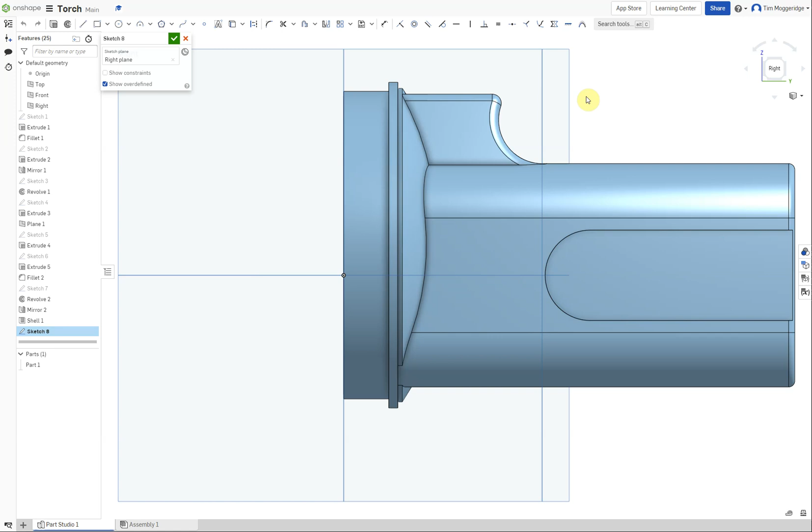We're going to draw the handle over here, and to start with we'll convert a couple of lines using the conversion tool: the top edge of the torch and this little arc over here. We might need to zoom in to pick up the curve and not just the center point, then zoom back out again.

I'm using the scroll wheel on the mouse to do this, and using this software with a mouse is so much easier than just using a trackpad. So it's a good idea to invest in a mouse if you haven't already done so.

Now we're going to add some lines. I'll pick the line tool, and remember, if I click and then click again, it will do a multi-line. So I've just done a vertical line, a horizontal line, a shorter vertical line, and another horizontal line, then I'll press escape to end the line, and now dimension those.

I'm going to dimension 40 millimeters from the line we created just now to the top line. Just enter 40 on the keyboard and hit enter.

I'm going to dimension the length of this line as 98 millimeters, and the length of this line is going to be 16 millimeters. That's that drawn so far.

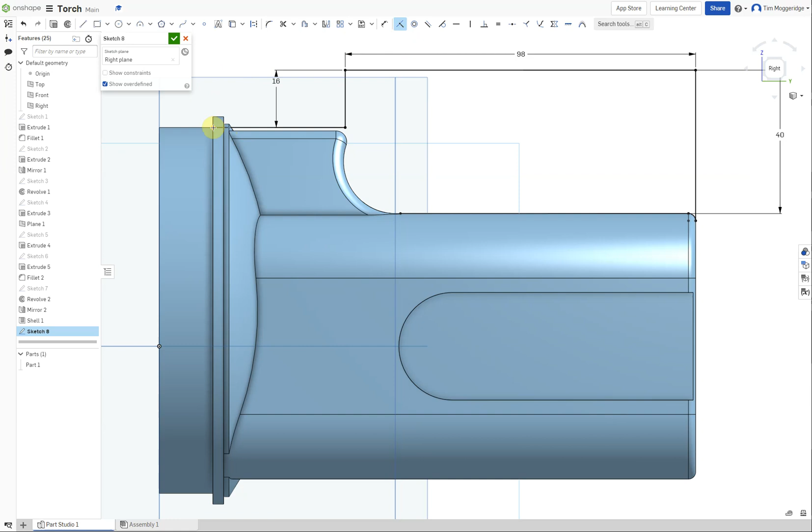I'm just scrolling around with the mouse again. The next thing I'm going to do is sort out the length of this line, using the coincident point tool. I'll pick the coincident point here, select the end of that line, and then select this line here. And there we go, that's moved to that point.

Zoom out, zoom in, so you've got an idea of the sketch we're doing. So there's a kind of basic outline shape for what we're going to do. We just need to add the inner part in as well.

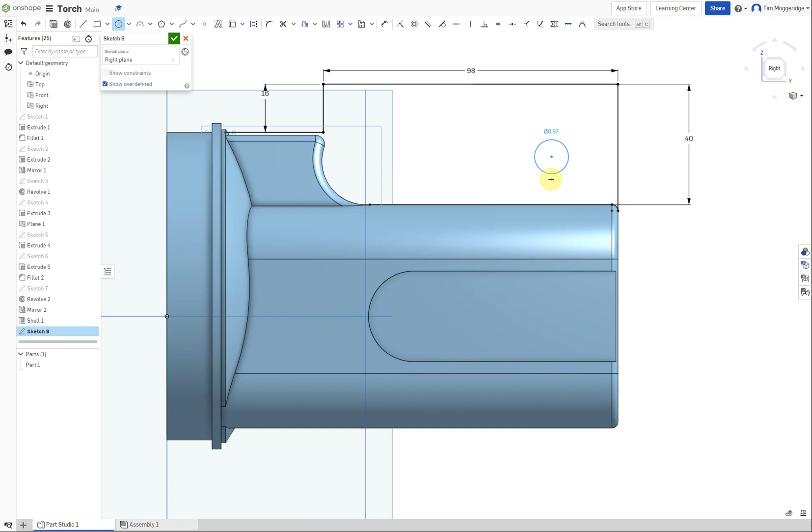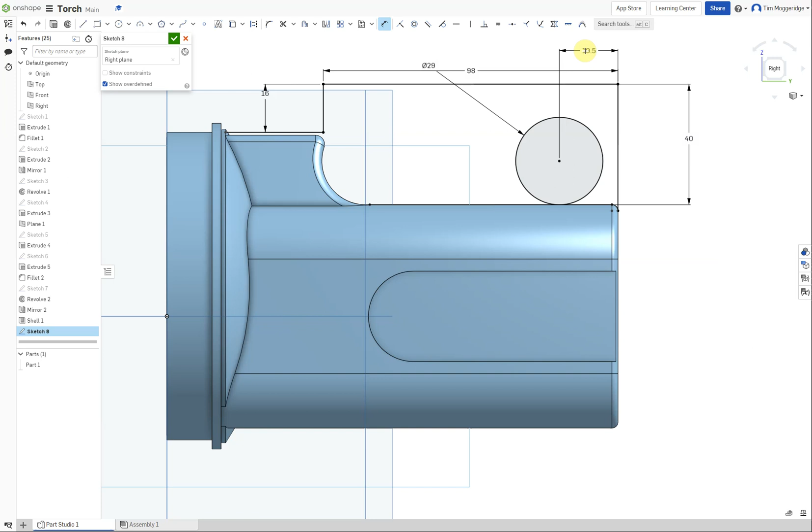I'm going to use the center circle tool and draw a center circle over here, coming down to that line so we have a tangential relationship. Then I'll dimension that so the diameter is 29 millimeters, and the center from the end line to the center of the circle is going to be 19.5 millimeters. Now we need to do a similar thing up here.

We're going to initially convert this line using the conversion tool again. Click on that line to convert it, then extend that line round. Under the trim tool there's the extend tool, and I can select that line and bring it all the way around to make a complete circle.

Now I want to draw a line that goes between the top two edges of these circles, using the straight line tool. I'll make sure it lines up with the origin and click, and again make sure it lines up with the origin and click, which allows me to put that line in. Press escape to end the line.

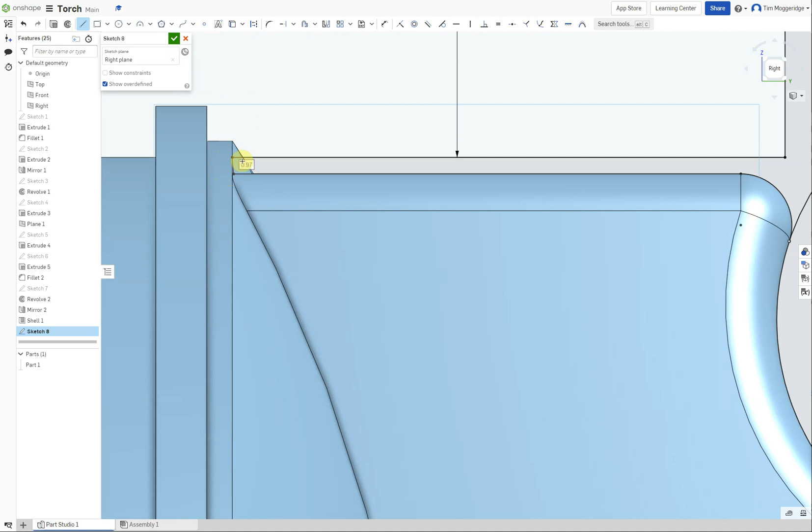We just need to add some bits in here, again using the conversion tool. Left click on the conversion tool, pick this line, and then pick this arc. Finally, the last thing I need to do is draw a line between these two dots. I'll zoom in, use the line tool, pick the end of that line, and snap it to the end of that line. Okay, and that's not quite gone to the edge.

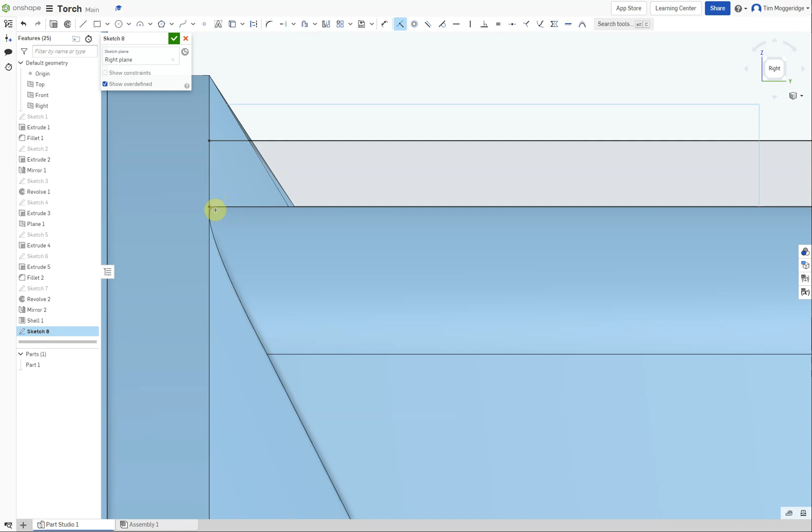You can see there from the little curve. So what we will do is add a relationship on there. Go to the coincident point, click on there, click on that line. Now you can see it doesn't like it, because it's already on the geometry. So let's delete that relationship, and you can see now that's joined that up.

So that's the basics of our shape. Let's right click and zoom to fit, and trim away the bits that we now do not need.

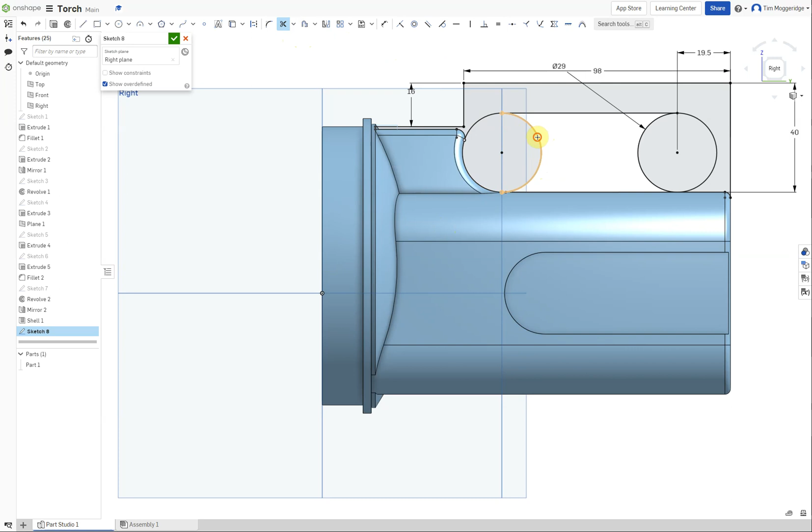We're going to use the trim tool, which may well be hiding under our extend tool. So go back to the trim tool, and firstly we're going to remove the inside of that circle and the inside of that circle, and we also no longer need this line here. If we come down there, we can see we've got a line there as well, so it's important that we take away this line.

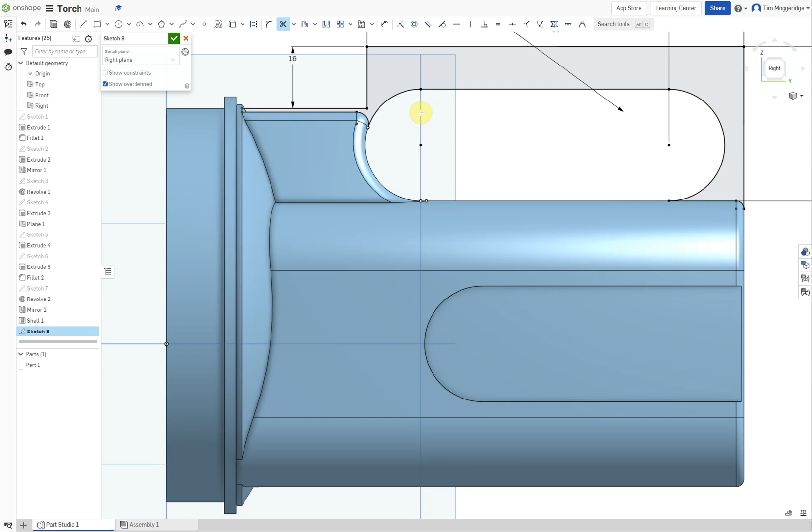And our shape has now gone grey. So we've got this shape all the way around here and up to here, which is what we want for the handle. We'll left click on here and change that to isometric so we can see what we're doing, and we're going to extrude this.

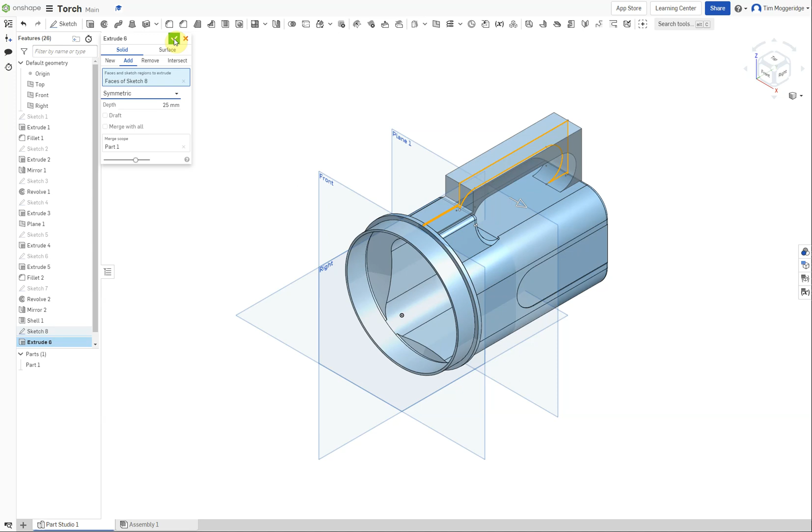So we're going to click on the feature tool, extrude feature. We want a distance of 25 millimeters, but we want it to be symmetric, so we're going to change that to symmetric, and you can see how it changes on there, and then we will click the tick to say that we are happy with that.

Now before we go any further, we need to add in a fillet on both of these ends, put a curve on, so we use the fillet tool. So we use the fillet tool here on this end, just click on there, and I'm going to change that distance to 18 millimeters and hit enter, and then tick to say I'm happy.

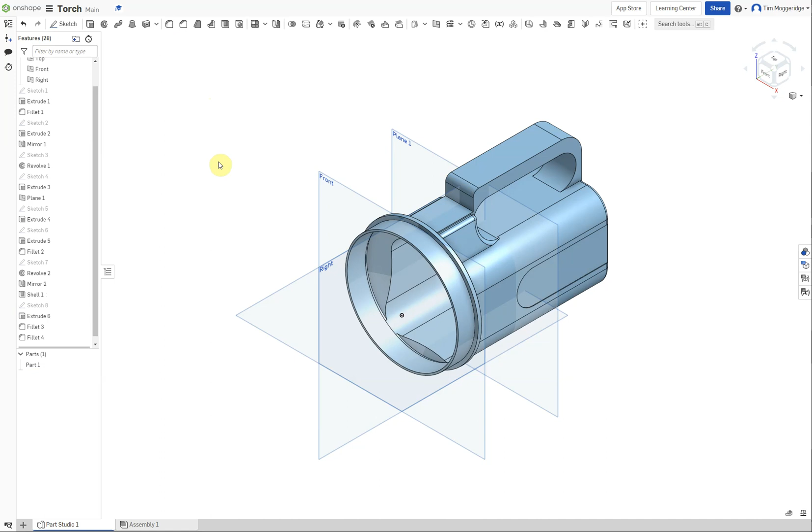And then I'm going to use the fillet tool again and click on this end, and this time it does just want to be 5 millimeters, so I can leave it at the default, so I can click and leave that to say that I'm happy. So at that point we've drawn the block of the handle in.

What we now need to do is add in the recess that's modelled on the torch. We're now going to add in the recesses, so we're going to create a new sketch on the right plane again. So right click on the right plane, left click on new sketch, press N to view normal to the sketch, and we'll just zoom in.

Now we're going to start off by creating some lines offset to the top and the bottom edges of the handle. So we're going to use the offset tool. I'm going to click on the top edge, and click on the radius on the right. I'm just going to drag now the arrow inside, because that's the direction I want to do. Hit enter, and then that will allow me to change the distance. So I'm going to hit 3 on the keyboard and hit enter.

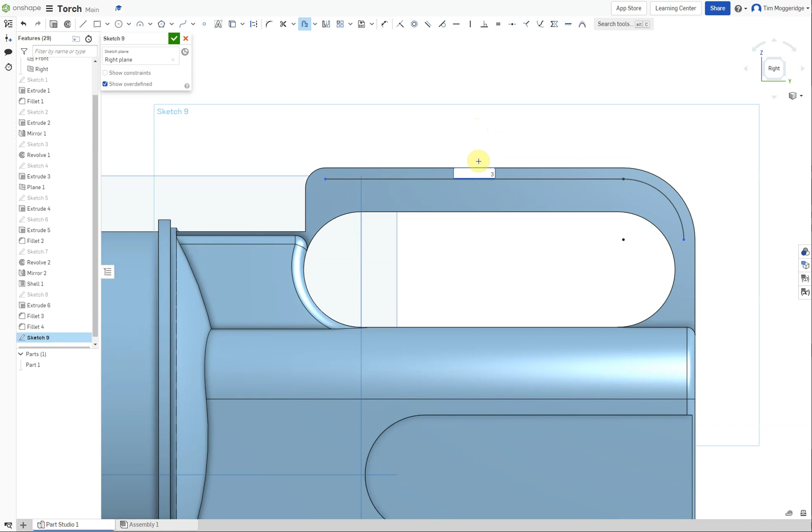And I'm going to do the same on the bottom edge. So pick those 2 lines, but drag the line above this time, hit enter, change it to 3, hit enter again. I'm now going to draw a 5 millimeter diameter circle.

Anywhere over here will do. What I'm going to do is just drag out a circle to start with, and then I'm going to dimension it so that it is 5 millimeters in diameter. I'm then going to dimension it so that the center of that circle is 80 millimeters from the end line that we did, 80.

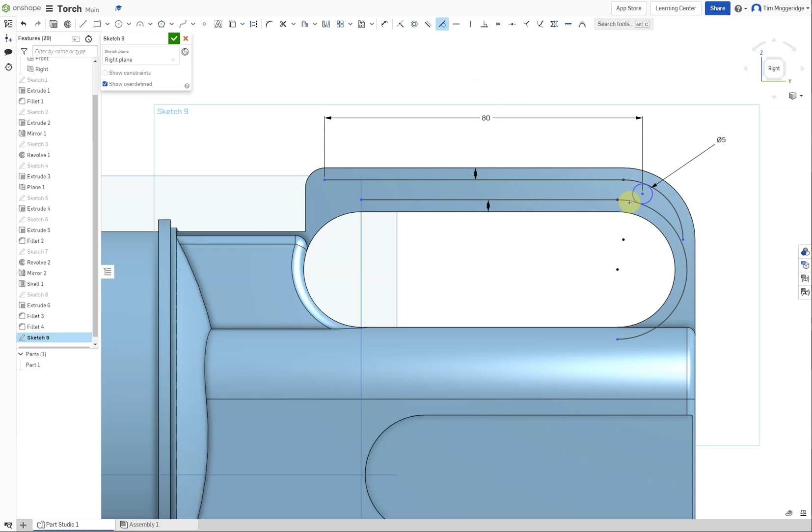And I'm now going to add a tangent point to it so that that circle and that curve are in touch with each other. And you can see that that almost touches this one. So again, touch that one and touch that one, and it will move so that that circle is positioned so it's got a tangential relationship with those 2 curves, but it is 80 millimeters away from the end of this line.

I'm now going to extend this line over to here, so we're going to use the extension tool again.

Click on there, click to the edge, and it's just gone over the edge slightly, which is fine. Now I'm going to draw another circle.

So I'm going to hover over the end of that line, come down, click so I'm vertically under it, click so I've attached to the line, and I'm now going to dimension that circle so that it is 5 millimeters in diameter. I can then use the trim tool, which is under the extend tool at the moment.

I can trim this line back to the circle. I can trim off the inside of that circle, and then over here I can trim the ends of those 2 curves and the inside half of the circle as well. So that's the first part of the slot drawn.

I now need to create 2 other slots over here. So again, center point circle. I'm going to come over here, draw a circle and put it there, and draw a circle over here and just drag that out. As long as they're approximately in the right places, that will be absolutely fine.

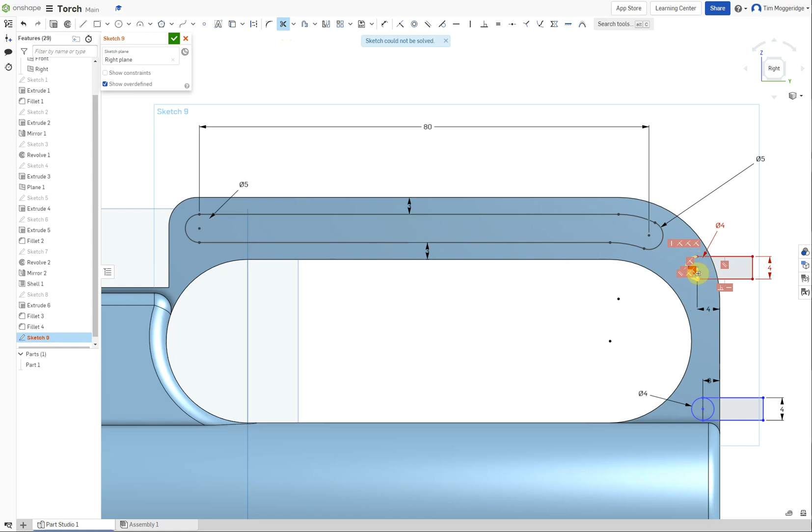I can now trim out the bits that I don't want, so I'm going to trim there, and if it comes up with an error, don't worry, I can trim there and there, and it will go back to the right colour. And likewise I can trim there and it won't like it, but if I trim off the other two parts of that circle...

It suddenly is okay. Last thing I need to do is to position these two vertically. So again, I'm going to go back to the dimension tool. From the center of this one to the center of that one wants to be 25mm, and from the base here to the center of there wants to be 2mm. And that's the position of those.

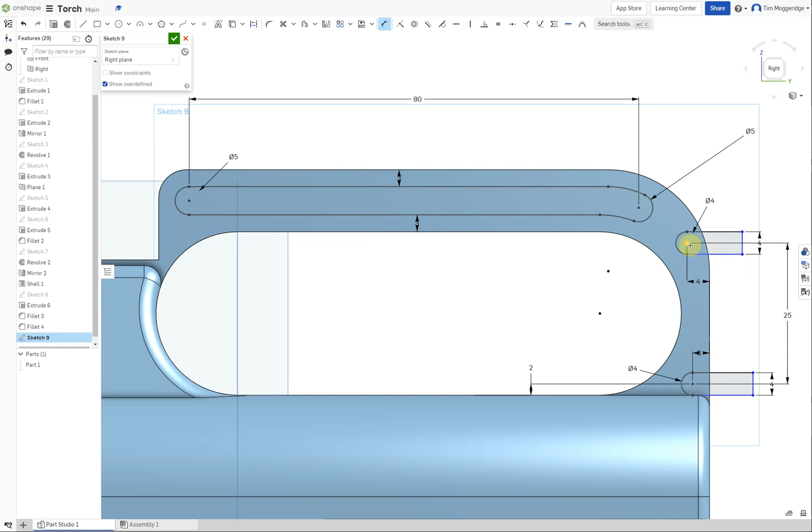So these bits, although they overlap, it doesn't matter that we've gone further out with these rectangles. Basically we're just going to cut out an element here, so we can see that that's in the middle. Now we actually want to leave a little bit of material in the middle, so when we cut them we're going to set a distance but also set an offset.

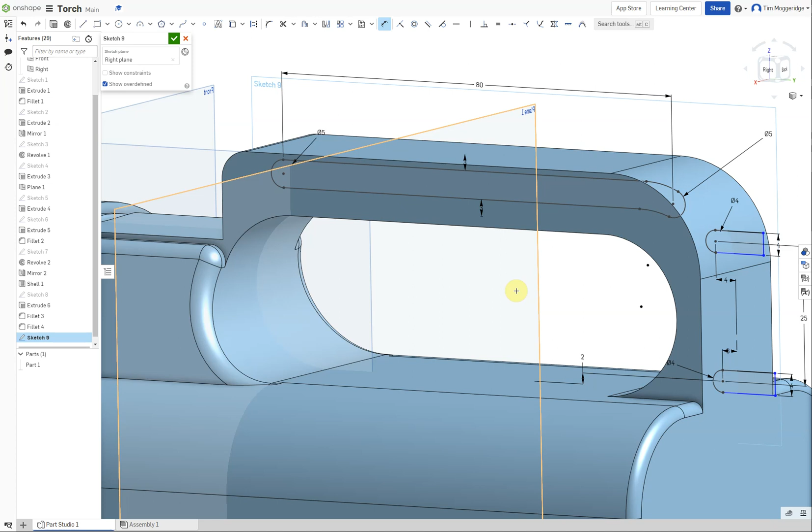So we're going to use an extrude feature. We're going to click on remove. We're going to start off with it coming towards us, so change the direction, change the distance to 12.5, and then second end position, we're going to make that 1, but it's important we change the direction so it's the same as this one. So click on there, and hopefully you saw it change over here.

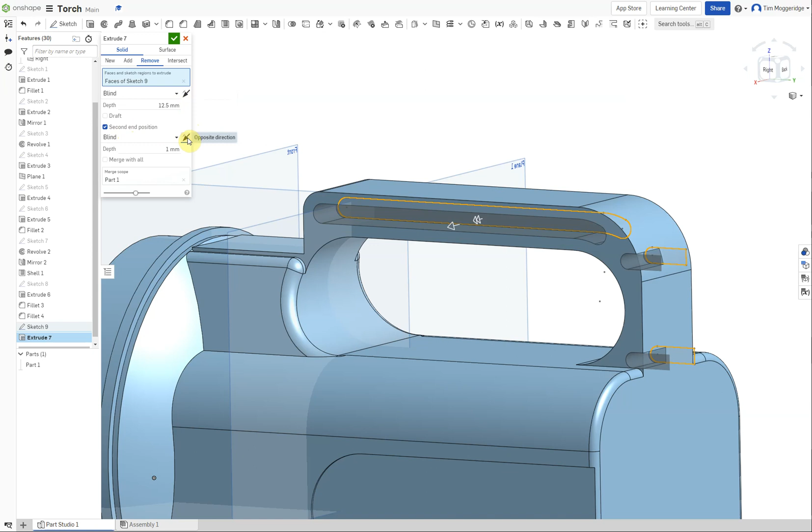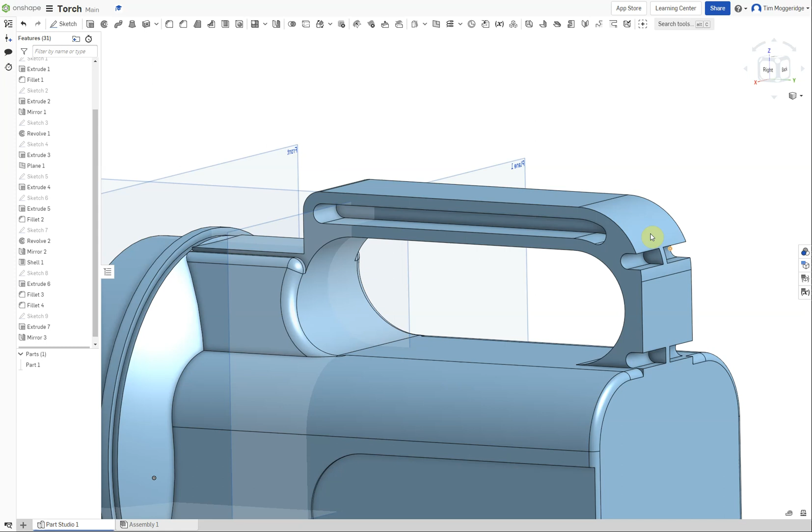And then we're going to click on the tick, and then we're going to mirror that feature. So we're going to click on mirror, we're going to change it to feature mirror, extrude 7 is going to be the feature, and then the mirror plane is going to be the right plane. Click on the tick, and you can see it's taken a chunk out either side, but it's left a web in the middle.

So let's go isometric, and we can see what we've done. And that's it for this video. Thank you for watching.